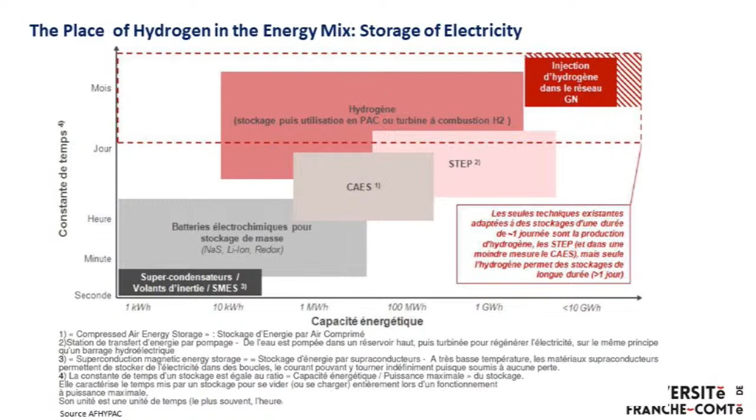Sorry, it's again in French, but you can compare different ways to store energy. Of course, for short time storage you can use a super capacitor or a battery, but with these devices you are limited in energy and also limited in time to store this electricity. One advantage of hydrogen is that you can store a lot of energy, and also store this energy for a long time. This is one of the main interests of hydrogen: storing a large amount of energy for a long time, for instance from summer to winter, if you produce energy with solar, for example.

Next slide, please. Here is the economic place of hydrogen today. You can see in this figure the growth of energy compared to the growth of hydrogen used, from a chemical point of view. The white part of the figure is chemical energy, and it's almost the same. As we go through time, there is more and more use of hydrogen in different sectors. We assume that in about 30 years, about 20% of the energy used will be hydrogen.

Here is a project map of hydrogen projects in the world. If you compare the projects in 2022 to 2023, the number of projects keeps increasing, showing there is a big interest in hydrogen today in the world. Even in Indonesia, you already have some projects, because your highland is very promising for this use of energy.

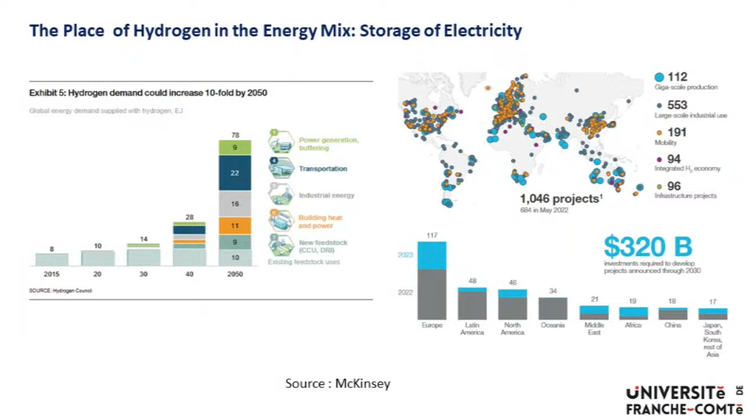Next slide, please. It's strange, but hydrogen has a lot of colors. This color is not the real color of the gas, of course. It's a color code to describe the type of production of hydrogen. Black hydrogen, brown hydrogen, gray hydrogen, and blue hydrogen are all made with fossil fuel. Today, about 95% of hydrogen is made from fossil fuel, so it is not like what we would like to produce in the future.

In the future, we assume the main source of production will use electrolysis with water, and maybe nuclear energy or renewable energy—energy without greenhouse gas. Today in Europe there is a big competition between nuclear energy and renewable energy, between France and Germany, because we don't agree on that point, and it's a big difference between our countries. So in the future, we assume that yellow hydrogen or green hydrogen will be most of the hydrogen that we can produce.

There is also the possibility to use white hydrogen. In the past, we assumed there was no hydrogen on Earth, but more and more people are finding there is some hydrogen on Earth, and we assume it will be possible to capture this hydrogen for the future.

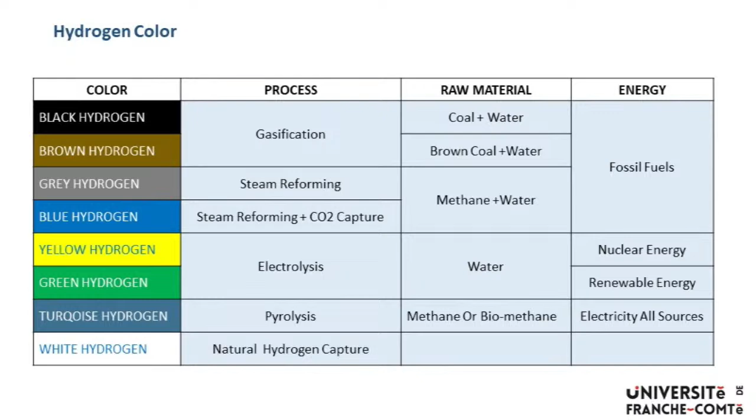Next slide, please. I want to give you some figures about the interest of hydrogen in energy. If you compare the energy you can get from hydrogen to other fuels, to fossil fuels, you can say hydrogen has three times the energy of fossil fuel. But there is a big problem with hydrogen: you have only 15 grams per liter at 200 bar and 20 degrees. So the problem of storage is huge, because although you have 3 times the energy, you only have 15 grams of hydrogen per liter. So it's not easy to use this hydrogen. Next slide, please.

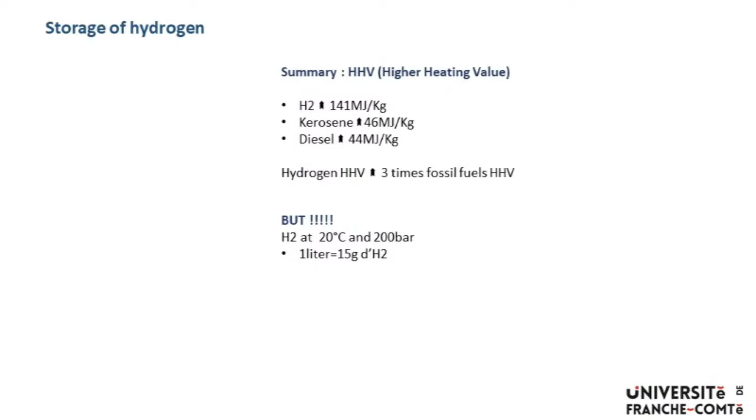So this is why we assume that because we have 3 times of energy and because electrical engine is 2 times efficiency than the thermal engine, we can assume that with 1 kilogram of hydrogen, it is enough to perform 100 kilometers. So if you assume that you want a car with 500 kilometer range, we need to have a tank, and this tank will be 330 liters. So it looks like a big tank if you transport your hydrogen at 200 bar. And 200 bar today is the way to transport hydrogen in a metal tank.

Next slide, please. So now if you want to design this tank, you need to understand what is the stress that you have in this tank. So it's an elementary calculation. You can see that you have axial stress and you have hoop stress. Usually, hoop stress is 2 times higher than the axial stress. This is why when you look at how you get a failure of a tank, the failure is always in a hoop direction.

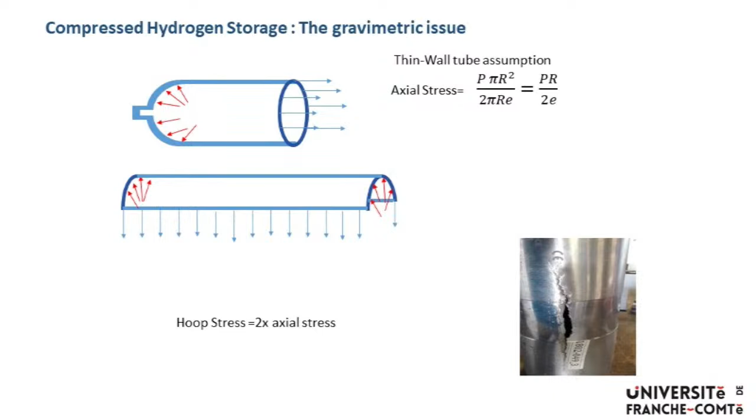So you design a metal tank in function of this hoop stress. Next slide, please. So, of course, when you design a tank, you need to take a safety factor. First, we use a safety factor which is a common factor, but it is called for Transportable Pressure Equipment Directive, and the safety factor is about 2. When you have this hoop stress and this safety factor, you can design this tank and find at the end the thickness of the tank. You can see here, for this tank, at 200 bar, the thickness is 10 millimeter. At the end, the mass of the tank is about 280 kilograms. So if you compare the mass of the tank to the mass of hydrogen you transport, you are around 1.75%.

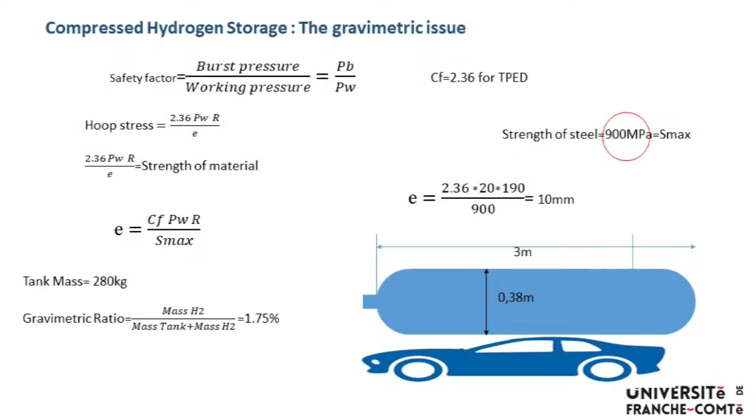So you transport mainly steel and not gas. This is why if you want to transport hydrogen, especially for long distance, and especially if you want to use hydrogen for car, it's not possible to use a steel tank. You need to use materials with higher strength. Here the strength of the steel is not enough for this application. So you need to use a composite material, with higher strength. Next slide, please.

So here, usually there is some animation, but here you have here the position of pressure tank at room temperature, and it is here. And you can see that if you increase the pressure up to 700 bar, you can get not 15 grams per liter like you have at 200 bar, but 40 grams per liter like you have at 700 bar. So for car, most of the tanks today are used at 700 bar and use composite materials.

Of course, there is other way to transport hydrogen. You can use metal hydride, you can use borohydride, you can use other kinds of, you can use also NH3. What's the name of NH3? I don't remember. So it's a chemical product, very famous, ammonia. Sorry, it's ammonia. But in fact, if you use this, it doesn't work for a car. So the only way for a car today is to use a pressure tank.

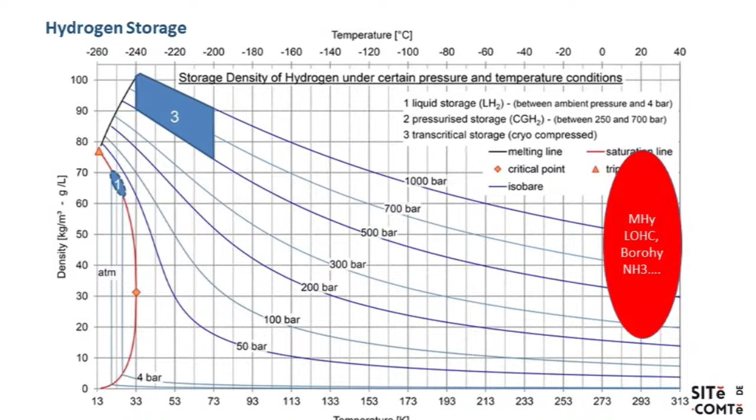Next slide, please. So this is why, if you use pressure tank, this is why we expect a big growth of carbon fiber in the future, because the requirement of carbon fiber, and especially high strength fiber, will be dedicated to this pressure vessel.

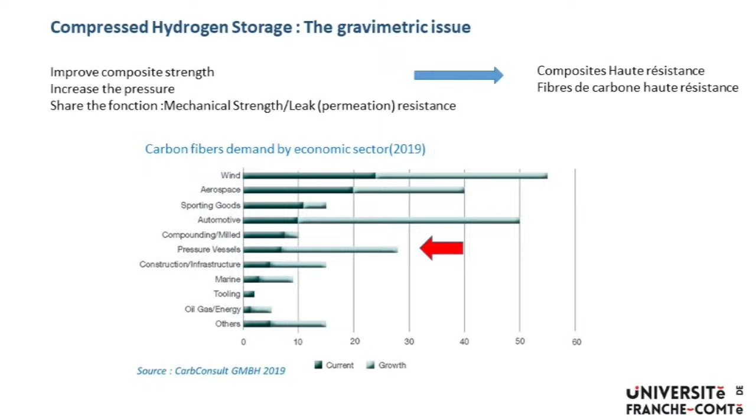Next slide, please. There are 5 types of tank today. The first one is a pure metal tank. This is the one we discussed. And more composite is used in this tank. So at the end today, what we call type 4. Type 4 uses a polymer liner and also a composite structure to resist the pressure.

And so the difference between type 1 and type 4 is you separate the function. In type 1, the metal is against the leak or permeation and also against the pressure. Here, for type 4, the liner is against the permeation and the composite is against the pressure. So you have a separation in this technology of the function of the tank. And with this kind of tank, especially type 4, today we can get about 6 to 9% of hydrogen inside your tank, and the tank at 700 bar. So it's, I would like to say, about 4 times more efficient than a metal tank.

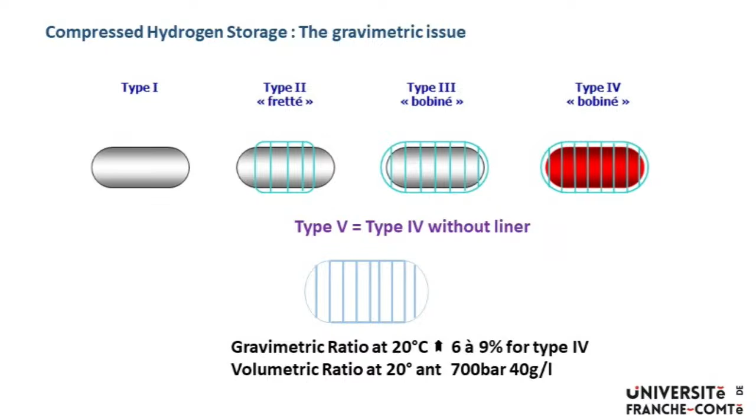Next slide, please. So it is how we produce this tank today. Usually we should have an animation of this figure, but here it doesn't work. So you can see a filament winding machine where you have a liner, and around the liner you have the filament of composite fiber.

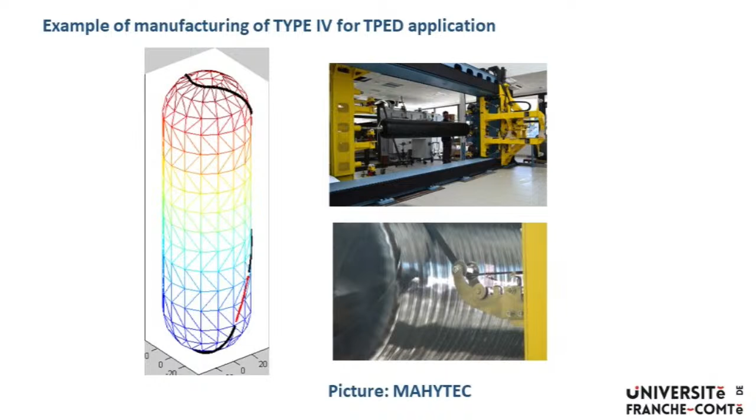Now I want to present two disadvantages of composite compared to other kinds of solutions. Of course, when you want to sell this tank, you need an approval of the tank. So in Europe you need a CE marking or Pi marking. Pi marking for transportable and CE marking for stationary application.

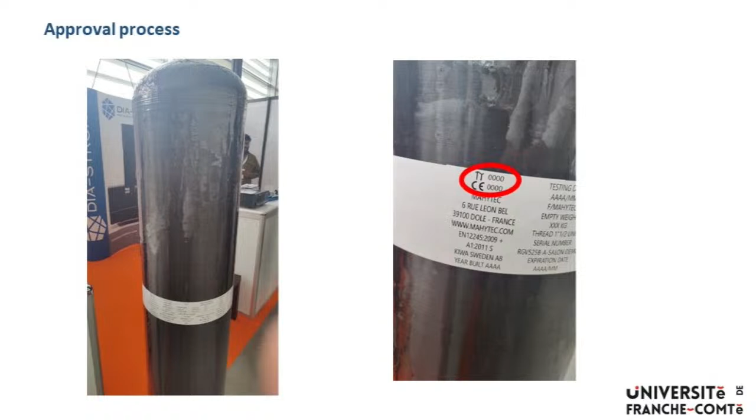If you compare the use of composite and the number of tests you need to qualify a tank, you can see that with a pure metal tank, type 1, you have a poor number of tests to perform. If you compare to type 5 or type 4, you have plenty of tests.

This is also due to the difficulty people have to understand the behavior of composite, because when you characterize metals, you have a relatively lower number of figures. If you compare to composite, which is an anisotropic material, you can have plenty of orientations of the fiber. This is why when you use composite, you have to pay about three times the money you have to pay to qualify a type 1 tank.

So using composite is not an advantage here. It's an advantage for the product, but not an advantage for the manufacturer.

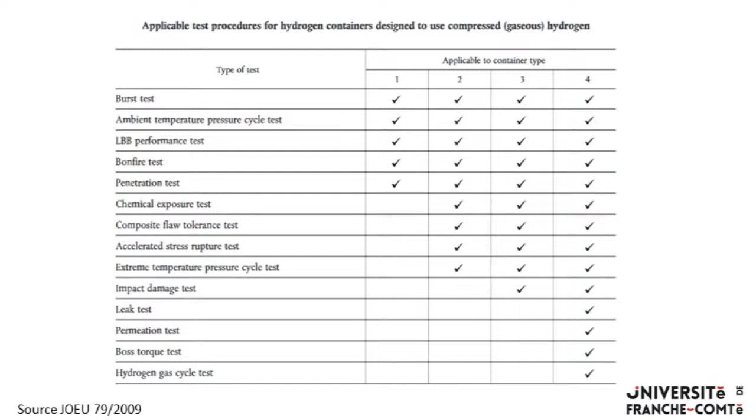Another trouble is more due to the difference of behavior that we have in composite and in metals. When you use a type 3, type 3 has a metal liner, a thin metal layer, and composite around it. You have a difference between the behavior of metals and composite, especially the difference of expansion coefficient.

So during the curing process, at the end, when you return to room temperature, you get a gap between the liner and the composite. So you have a thin space between both.

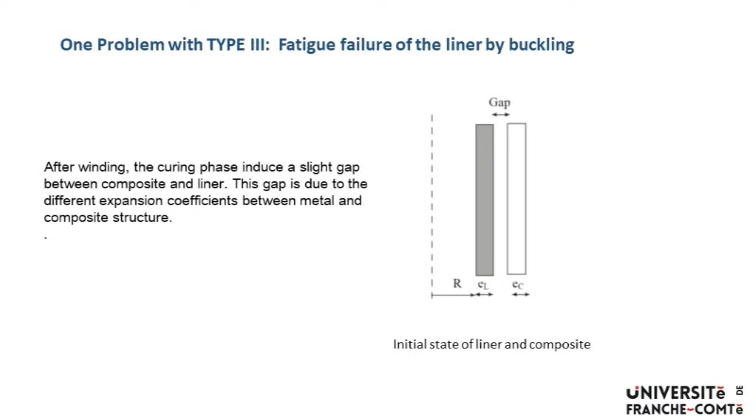This space can be observed when you make the first loading of the tank. Here you have some strain gauges on top of the composite, and you can see you increase the pressure, but for a certain time you have no strain on the strain gauge on the surface of the composite. This is the time to get contact between liner and composite.

After that, when you get contact between liner and composite, you have the deformation of both materials. But this induces a difficulty for the liner.

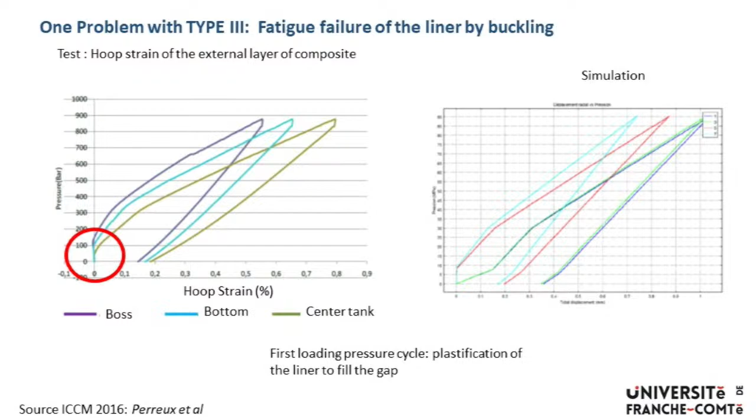Here, if you look at the behavior when you increase this pressure, the behavior of the liner and the behavior of the composite, you can see that during the first part you don't have any deformation of the composite, but you already have a deformation of the liner.

When you return at the end, due to the possible plastification of the liner, it could be in compression, external compression, due to the composite. So it looks like you can have a buckling of the liner.

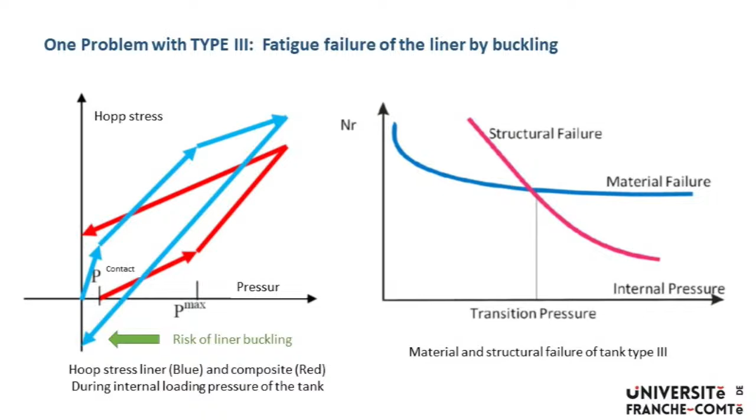In fact, if you design a type 3 tank with high pressure, you have a very big trouble in fatigue, because it's not possible to get type 3 with high pressure use. There are different kinds of failure. For low pressure, you have a material failure of the tank, but for high pressure, you have a structural failure due to this buckling.

So there are very different kinds of solutions, but none is good. First, you can say, okay, if I have buckling, I increase the thickness of my liner to reduce the risk of buckling. But if you do that, you increase the mass of the tank, so it's not good. You can increase the yield point of plastification of your liner, but if you do that, especially with hydrogen, you can have a risk of embrittlement of your material.

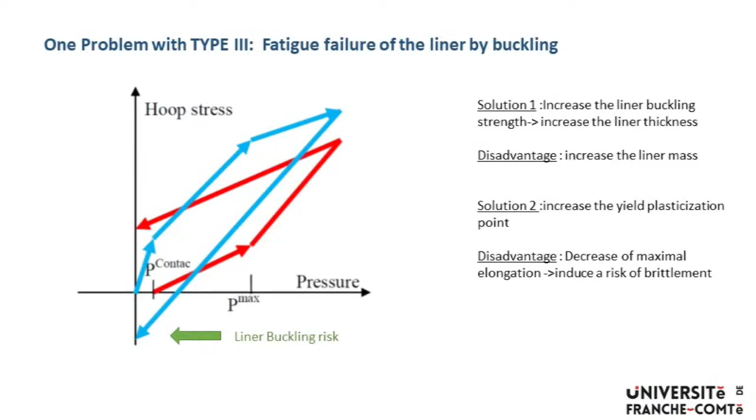So it's not possible to do that. The standard doesn't allow a liner with more than 900 MPa maximum strength. Or you can use fiber with higher stiffness in order to reduce the deformation on both.

But while it works, if you do that, you increase the cost of the tank. So today, there is no good solution to solve this problem. The only solution is to use a tank under about 350 bar. For 350 bar, you can use a metal tank type 3. Above this pressure, it's better to use type 4.

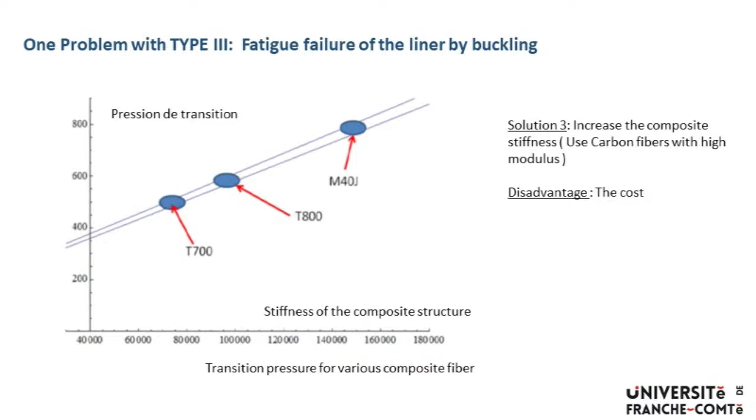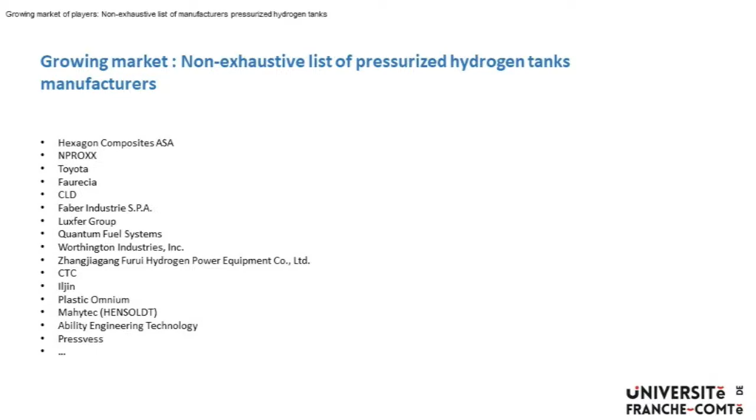Or if you want to use aircraft with hydrogen, as is required now, because more and more aircraft is not very well appreciated from an ecological point of view, you need to find a solution to remove kerosene and maybe use sustainable fuel. One of them could be hydrogen, where there is no greenhouse gas. So in that way, there is no solution at room temperature.

The only solution you have is to use a cryogenic tank at about 20 Kelvin, so it's very cold. This tank can also use composite materials. And today we expect that hydrogen aircraft should be a new holy grail for composite, and especially for composite with high performance.

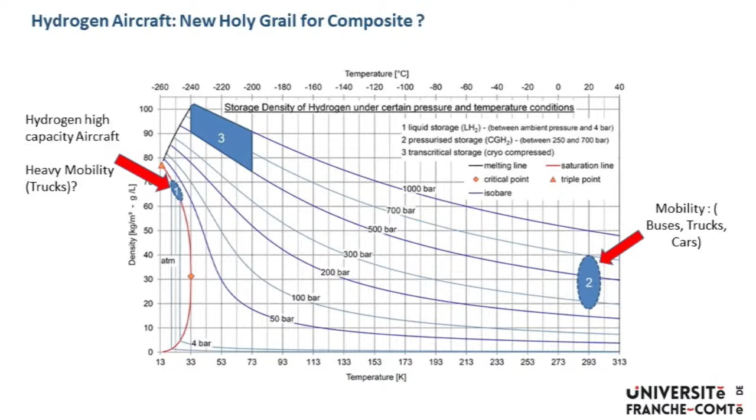And I am sure that if there is here some young doctor who is interested in this topic, they can work on this their whole life, and then be retired and continue to work on these topics, because it will be a long time to develop this tank.

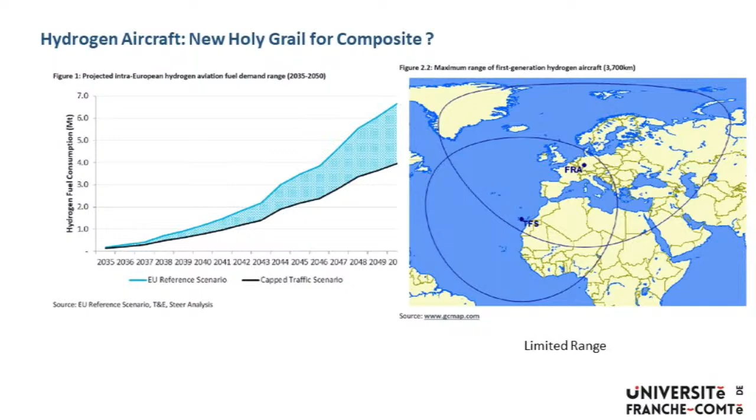It's today not possible. So the way to cross with sustainable aircraft will be to use a dual fuel technology: sustainable fuel and hydrogen. Hydrogen to start and take off, and maybe during the transfer use sustainable fuel.

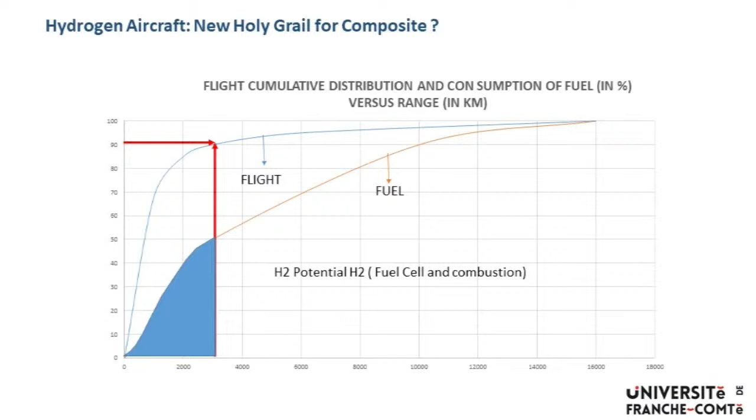Even if you are limited in range, you can see on this figure that today about 90% of flights have a range of less than 3,000 kilometers. This 90% of flights have a consumption of about 50% of the fuel. So if we work on hydrogen aircraft, in the future we can save 50% of the fuel by using hydrogen. Of course, for long range we need another solution, since it's not possible to use cryogenic gas today.

Next slide. So there is some thinking about that, and in my lab we are working on this. Today people think cryogenic is the best solution to transport hydrogen, but in fact this induces a lot of trouble, because liquid hydrogen is very difficult to manage. So some people, especially at Dassault in France, think it could be possible to use cooled gas instead.

Cooling the gas to about minus 80 or minus 100 degrees Celsius, also with high pressure. You can see in this figure that at minus 120, the gravimetric you have is about 60 grams per liter, which is very close to the gravimetry you have with liquid hydrogen. So if you cool your hydrogen and increase the pressure, the volume of the tank will not be much bigger than with liquid hydrogen, and it's much easier to manage the filling with hydrogen under pressure than filling with liquid hydrogen.

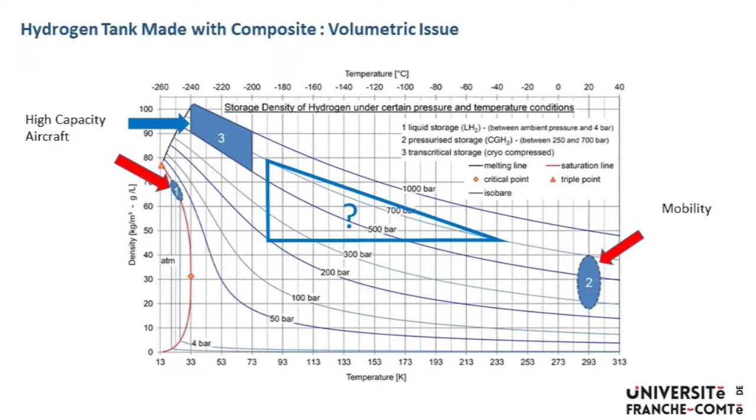Next slide please. So this is my conclusion. Next slide.

Conclusion: what we can see is that in different kinds of sectors, there is a requirement for materials against corrosion. We need very high mechanical performance, thermal performance, and light materials. This is why I believe that composites have a bright future ahead of them.